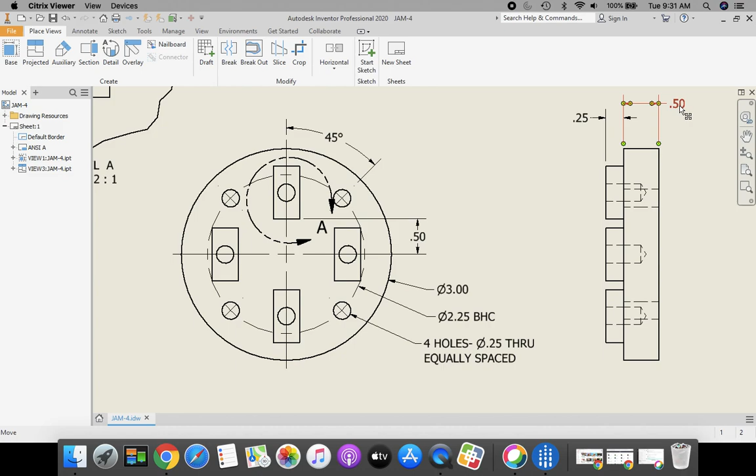Starting off, we're going to start with our 3-inch outside circle, which is this area right here, and we're going to extrude it back 0.5 inches. Some of the things that we're going to be taking a look at today are techniques where we use construction lines and a bolt hole circle. We're going to introduce a new tool to you, which is called a 2-point rectangle. We're going to be doing something new as well, a fixed circular pattern for those islands.

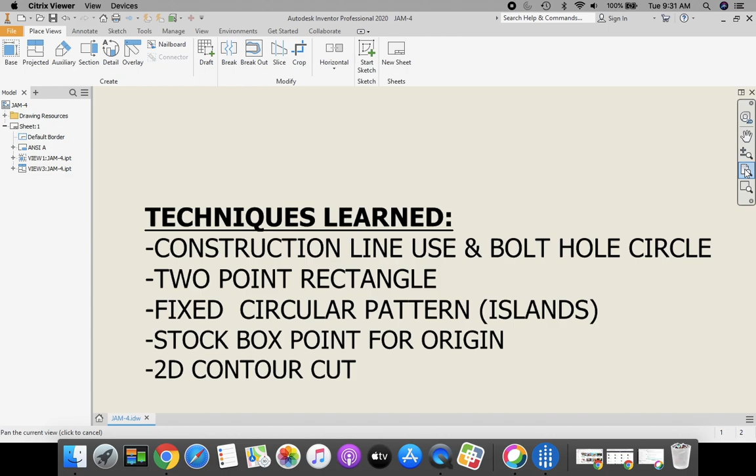And when we start CNC milling, we'll do a stock box point for our origin, and we're going to do a 2D contour cut. Also, we're going to be showing you how to enter that detail view up here as well. Okay, so let's have a little fun today on the Jam part.

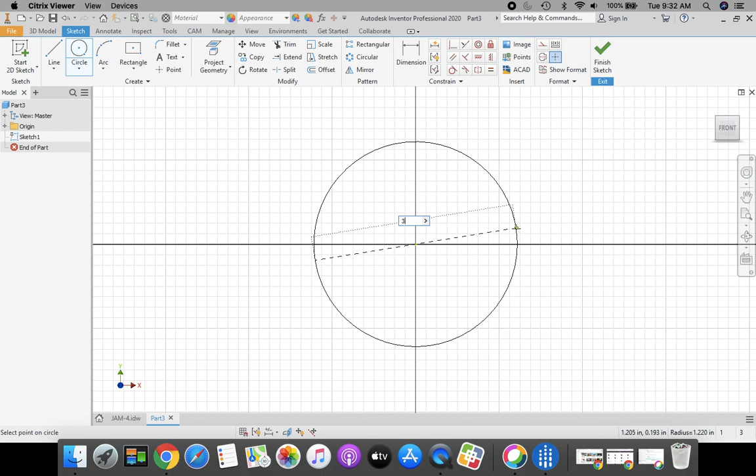From our main Inventor screen, let's go to New, Standard IPT, and click Create. We're going to begin with a 2D sketch from our XY plane as always, and click Front in your ViewCube. Starting off with my circle, I'm going to start at the origin, get my green dot, stretch out a circle. This is going to be 3 inches. Press Enter on the keyboard. Green check mark, Finish Sketch. I'm going to go home.

I'm going to extrude next. I want to extrude, as always with my first extrusion, direction number 2, which is that flip direction. And I'm going to enter in a distance here of 0.5. Press Enter on the keyboard to show it, and then click OK on your menu.

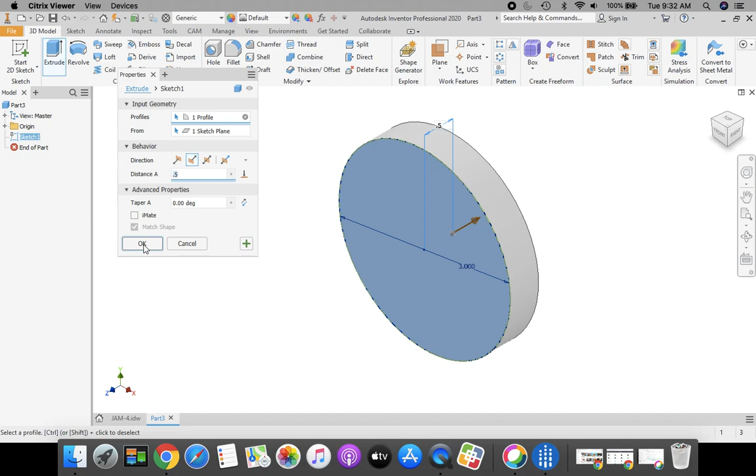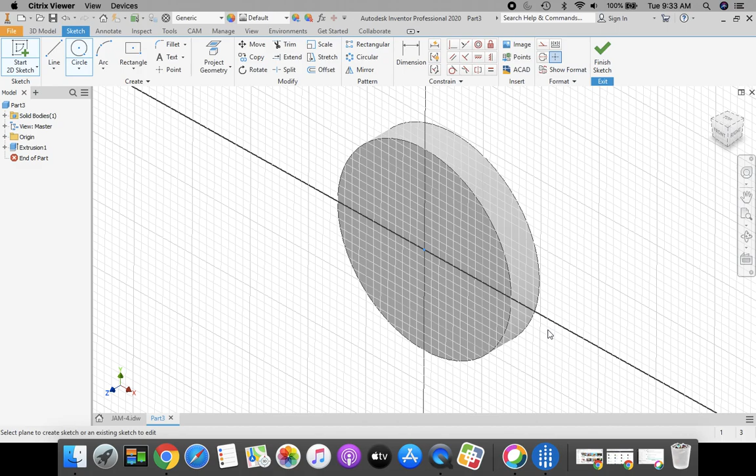Now that we have that part for the base drawn, let's take a look at these holes. We're going to have to enter in a vertical and angular sketch line at 45 degrees. And we're going to have to place another construction line coming around here for our bolt hole circle, which is 2.25. Okay, so let's begin with that. 2D sketch on our front view. Click Front in your ViewCube, or you can click Zoom All, the magnifying glass piece of paper on the navigation bar on your right hand side.

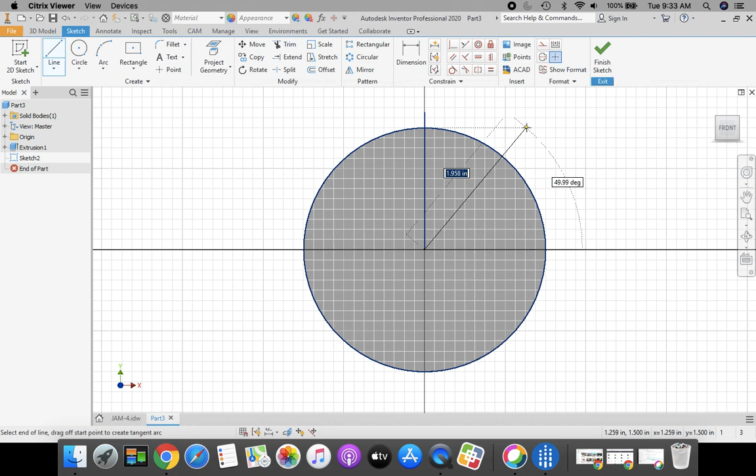And we need to get those construction lines in there. So I'm going to start at my origin with my line tool, and I'm going to make sure that I'm perfectly vertical, getting that vertical snap to pop up, that little gray box on the side. Click, press the Escape key. I'm going to get another line starting from my origin, and sketch out another line at an angle out here. Click to place it, press the Escape key.

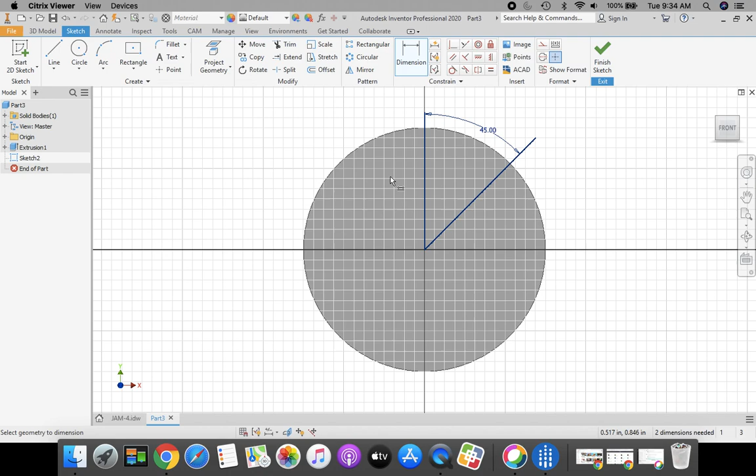Now let's dimension this to that 45 degrees. Get your dimension tool. We're going to dimension from the vertical line to the angular line, and enter in 45. Enter on the keyboard or green check mark. Now we need that bolt hole circle coming around. If we take a look at our drawing, it's 2.25 diameter, see that right here? Let's go back to our part. That's going to be done with a circle, so let's use our circle tool. We're going to place that at our origin, stretch out a circle, and this diameter is going to be 2.25. Enter on the keyboard.

And now we need to place that point. So we're going to come up to our top area in our ribbon bar and click Point. If you have to zoom in, that's fine, but the cursor is going to lock on to that intersection of where this angular line and that bolt hole circle are. Once it locks on there, click to place it. And now we're going to circular pattern that. We could also finish sketch and circular pattern a feature, but I'm going to circular pattern that sketch right now.

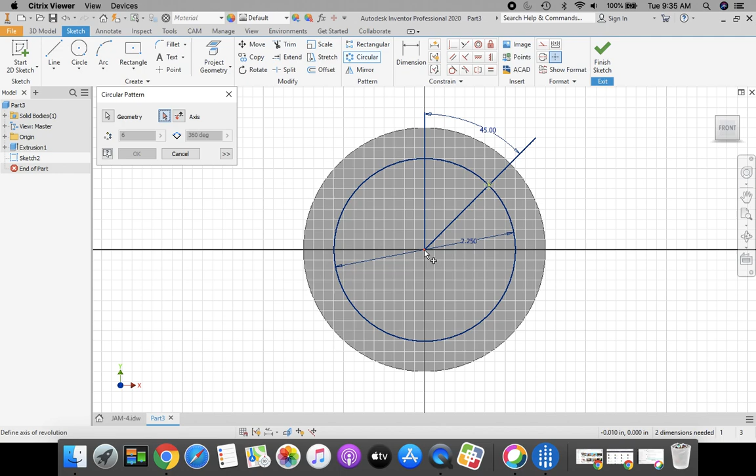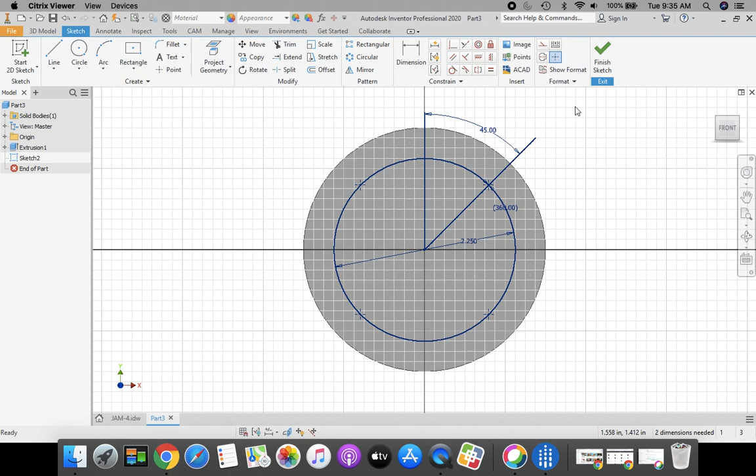So when I circular pattern, I'm going to select my geometry, which is just going to be that one point. Then I'm going to get the pick tool for my axis. I am going to click my origin, which is the center of my part. By default, it comes up with 6. I'm going to change that to 4. And I do want it to rotate 360 degrees. So click OK. Now I have those 4 points going around. The construction lines that are on here, we can just leave them. Green check mark, Finish Sketch. I'm going to select my hole tool.

Now before we get going on this hole tool feature, let's take a look here. These 4 holes are diameter of 0.25 and they go all the way through. Going back to our part, with my hole feature up, I'm going to have a simple hole with no seat. I want to go all the way through, so my termination distance, I'm going to change from a distance to through all. And then my diameter, I'm going to change to 0.25. Once you have those things done, click OK.

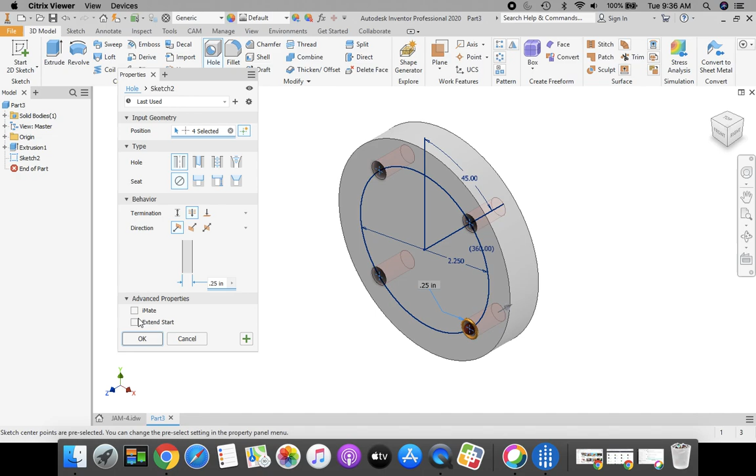Alright, next, let's take a look at our islands that are up here. On our front view, I can see I have one dimension here that positions my island a ½ inch up from the center. However, there's no other dimensions on here, and that's where I'm going to refer to my detailed view. So the overall dimension is 0.375 by 0.75 vertically for this island, and there's going to be a hole placed in the middle. Okay, let's start working on this.

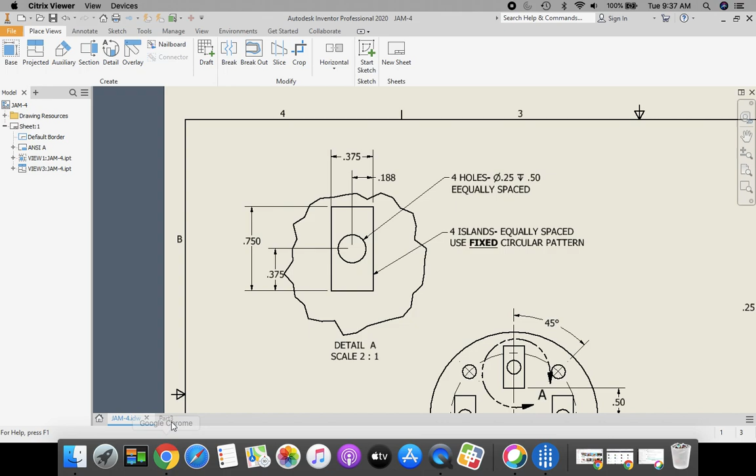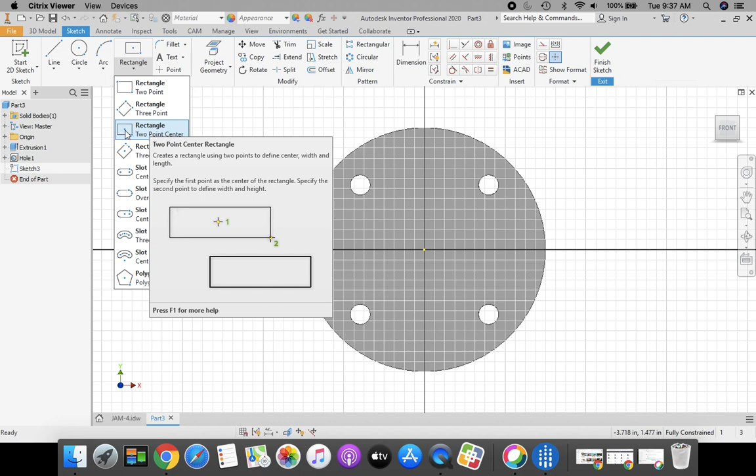Going back to my part, I'm going to take a 2D sketch, place it on my front view, and right at the 12 o'clock position is where I'm going to start. This is a new tool for us. If we come up here to our rectangle area, the button that's on the bottom, I'm going to click on that and I want to go down to rectangle 2 point center, and that gives me the center and one of the corners, so I can make sure that this is placed at that y-axis by my part. I'm going to come back up here and I want to be locked onto my y-axis, and I'm going to click and I'm going to stretch out a rectangle.

And the distance of that rectangle was 0.375 for the horizontal. Press the tab key. My vertical is 0.75. Enter on the keyboard. And now we need to position that for how high it is up off the center. So I'm going to get my dimension tool. I'm going to select my origin and the bottom of this rectangle that we just created. And this distance was 0.5. Okay, that looks great. Let's green check mark finish sketch.

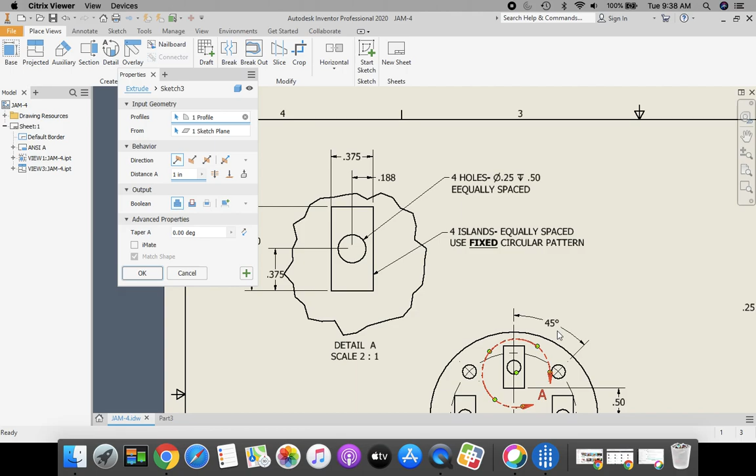We're going to extrude. And I don't remember what that dimension was, so let's bring up our drawing. We can come over here to the side and we can take a look at our drawing. This island shown here, we're going to extrude it 0.25 going in direction 1, or that default direction. Okay, going back to my part. So I have it in default direction, showing that it's coming out towards us, and I want to change my distance to 0.25. Okay, that looks good. Click OK.

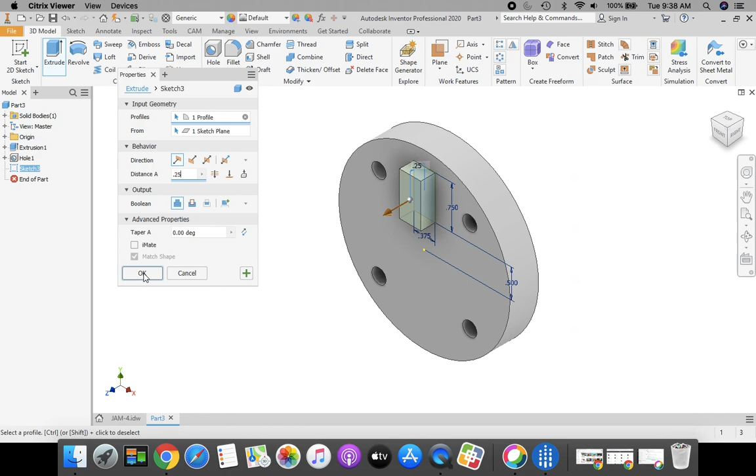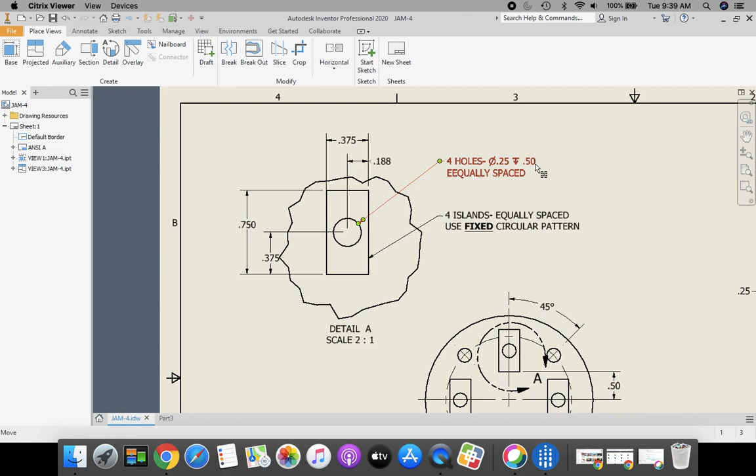Before we revolve this around or circular pattern this around, we're going to take and place that hole in there as well. So let's take a look back at our detailed view. The center of that hole is 0.188 in from the side and 0.375 up from the bottom. And those holes are a diameter of 0.25, but they only go a ½ inch deep, 0.5 deep. Okay? Let's go back to our part.

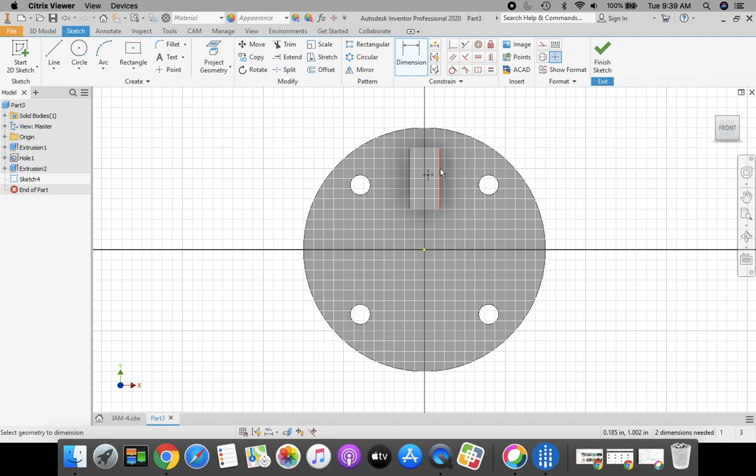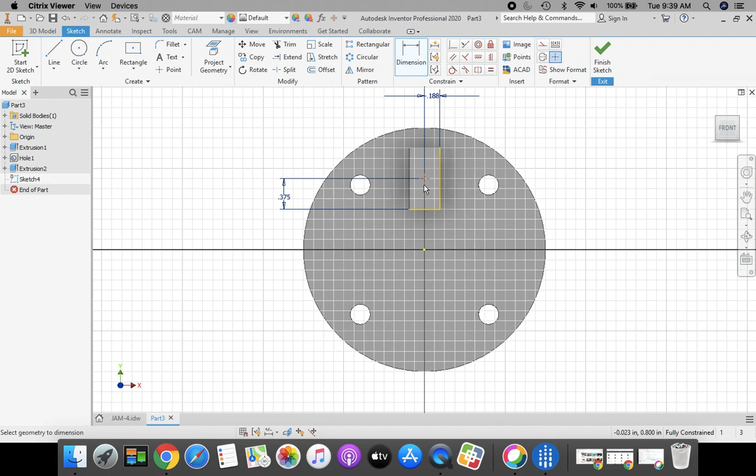We're going to take a 2D sketch, place it on the top of this island. And then I'm going to get my point tool, place a point on my part. I'm going to dimension from the right-hand side to that point. And this is going to be 0.188. And that should put it right in the center. I'm going to dimension from the bottom to the point. And this should be 0.375 for a dimension. And that should perfectly center it top to bottom, right to left on this island. Okay, let's finish the sketch using our hole tool feature.

Coming down from the top again, I want to have a simple hole with no seat. I'm going to change my through all feature to a distance. I want to enter in a distance here of 0.5 and a diameter of 0.25. Once you have that done, click OK.

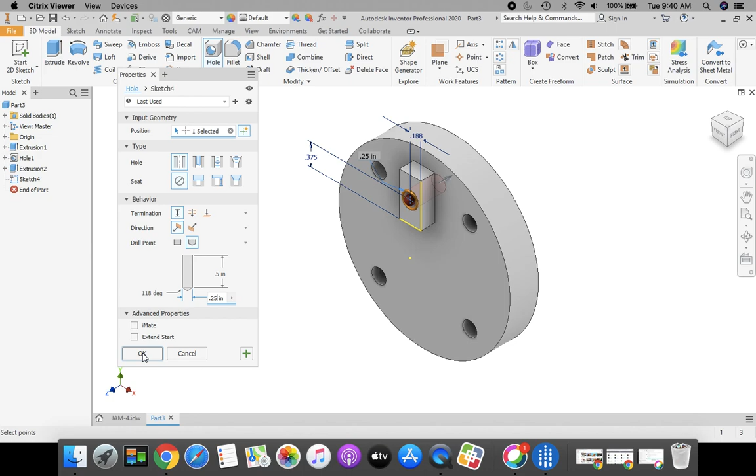Now we're going to circular pattern that. So we're going to come up to our pattern area, click circular pattern, select my feature. Now I'm going to take both of these. I'm going to take the hole and I'm going to take the island. So I want to have two things that I'm going to be circular patterning. Then I'm going to select my rotation axis, the pick tool here, and I'm going to click the outside of my circle.

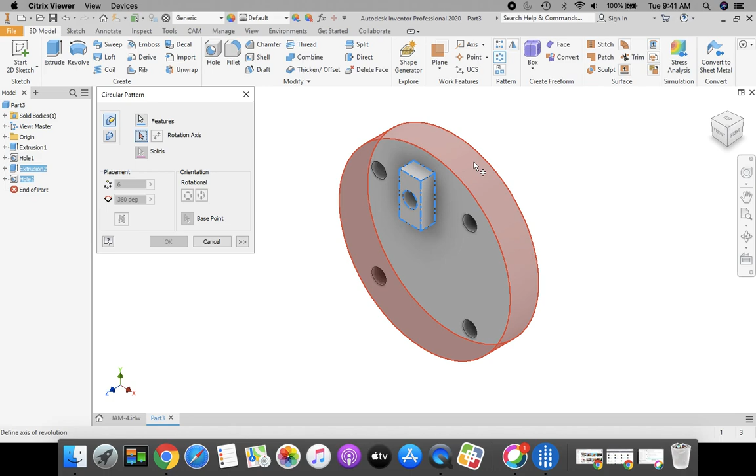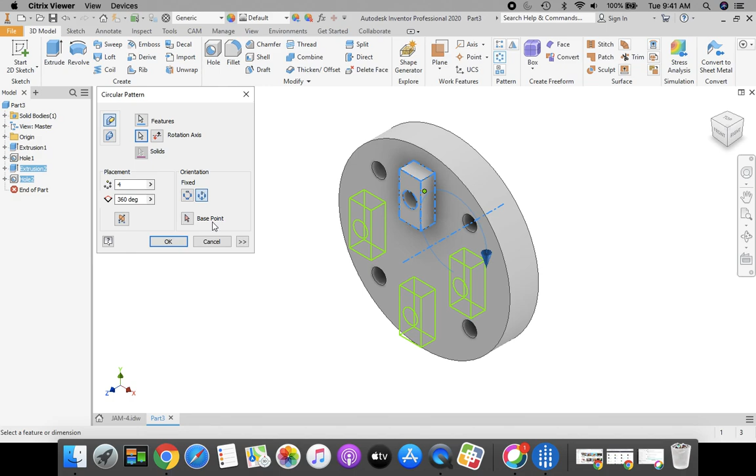Default, it comes up with 6. We're going to change that default number to 4. And then before I click OK, I want to have my fixed rotation on right here. And you're going to see what it looks like in my presentation here. It's going to keep them the same vertical orientation. Click OK. Looking good. Next, let's change our material type. Go up to the top, go to default, and we're going to scroll down and we're going to find smooth red. Right there, smooth red.

And then we're going to go up to File. We're going to go down to Save As. Make sure that this is going into your H drive. Click on the pull-down menu here. Go down all the way to first initial last name 000, the gray box with your green line on it. We're going to give this a title of 4 JAM, and then your last name. And click Save.

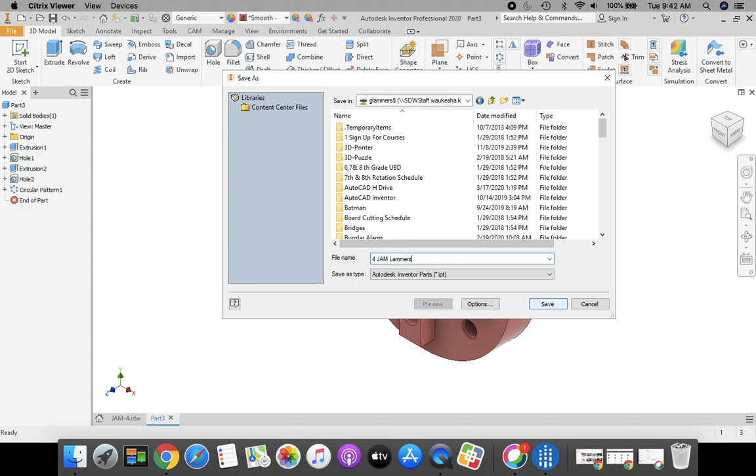Great job. The next video is going to be how to run our toolpaths, drilling these holes and cutting around these islands that are up here. Stay tuned for the next part for our CAM toolpaths.